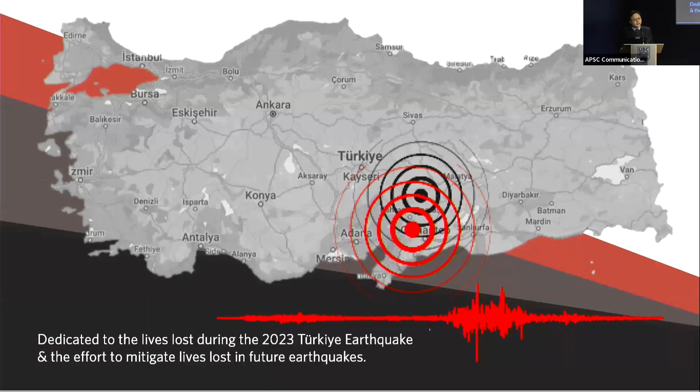Very good. All right, I've been asked to give a general introduction, so I'll jump right into it. First of all, we'd like to dedicate this seminar to the lives lost during the 2023 Turkey earthquake event, and also to the effort we are putting together for the future to mitigate any life loss in future earthquakes.

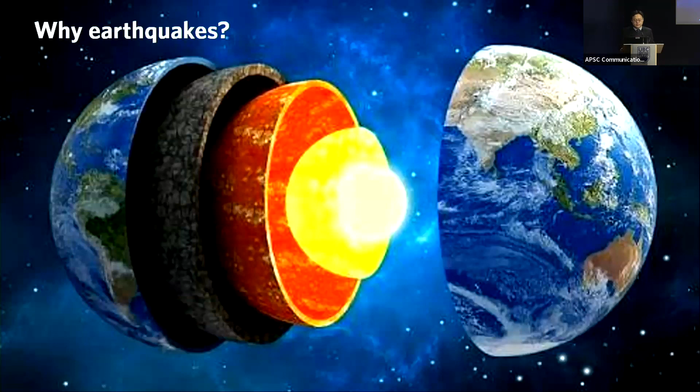Today I'm going to bring you to the event in February 2023 in Turkey. For those familiar with Turkey, it's a beautiful country with wonderful history and great food. The earthquake actually happened in the southern middle portion of Turkey, close to the city of Gaziantep. This is about 850 kilometers away from Istanbul, probably like from here to Banff, from Vancouver to Banff, so a relatively close distance that you could easily drive to if you wanted to. Right around there, close to Gaziantep.

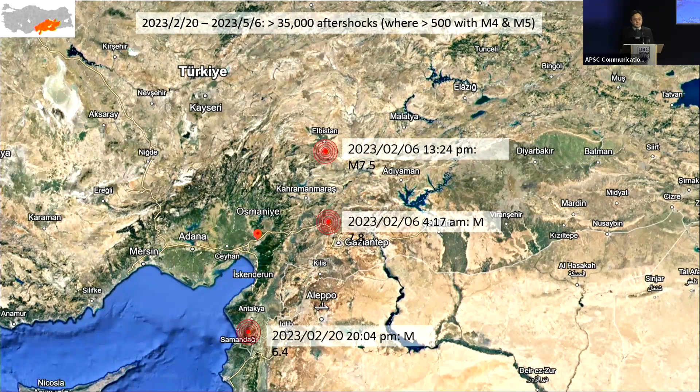And it doesn't stop. Literally two weeks later, on February 20th, another major earthquake continued to hit the region, a magnitude 6.4 earthquake that caused devastation to the entire region. And the earthquakes still didn't stop. Over the period from February 20 to May 6, there were over 35,000 earthquakes recorded in the region. Many of them, over 500, were magnitude 4 and 5 earthquakes that could be felt by us and could cause some damage.

This earthquake resulted in significant damage to structures and the environment. We can see surface ruptures all across this area. It resulted in 11 major city centers in the region being heavily affected, representing over 160 municipalities and over 1,300 villages all affected. The area affected is greater than 100,000 square kilometers, and over 14 million people are affected by this earthquake.

Half of the population of Canada would be affected by an earthquake like this. Sadly, over 50,000 people, including people in Syria, over 60,000 people have died from this earthquake. And over 2.5 million buildings were significantly affected by the earthquake. Not 25,000 - 2.5 million buildings were affected by this earthquake.

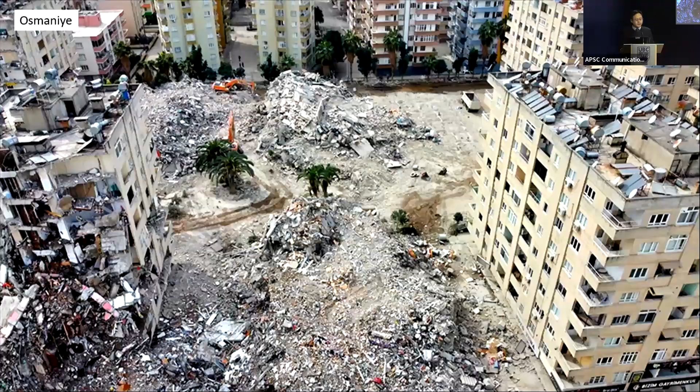Overall, based on the data we collected in the report we generated, there are over 2.5 million buildings affected by this earthquake, categorized into new and old buildings. The majority of these buildings in these 11 major city centers, more than half of them, are relatively new buildings built from 2000 onwards. Most of those buildings are reinforced concrete structures and they are residential buildings.

We looked into the damage to the buildings, and the results show over 500,000 buildings are completely damaged and need to be demolished. Close to 130,000 buildings are moderately damaged, and over 1.27 million buildings are lightly damaged and affected by the earthquake, causing a direct financial loss of $66 billion directly to the building sector alone.

In light of this, over 2.2 million people do not have a place to go home, and shelter must be provided. In addition to that, this region badly hit by the earthquake is heavily into agriculture and farming.

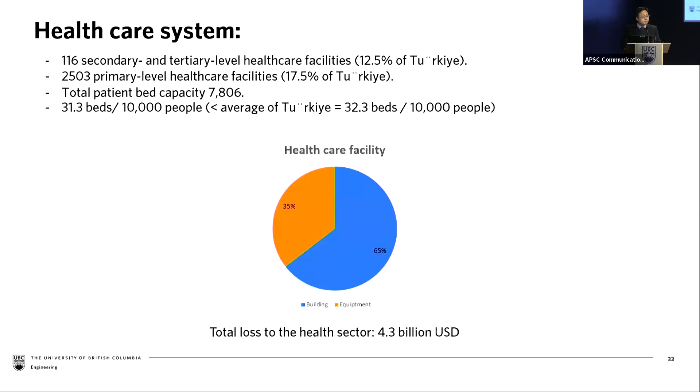In general, the social and economic impact to these 11 major city centers in Turkey affected more than 14 million people. More than 50,000 people have lost their lives, and over 115,000 are injured. More than 2 million people need a place to stay that we need to replace, causing direct financial losses to the country of 103 billion US dollars, representing around 9% of Turkey's GDP in 2023.

This afternoon we'll be going through detailed technical sections, starting with my colleague Professor Alemdar talking about the seismic effect of the region, and the geotech effect of the region, in collaboration with Dr. Keshab Sharma. Afterwards, I'll be presenting about the building code in Turkey. We wanted to know what they do differently or similarly compared to Canada and other parts of the world.

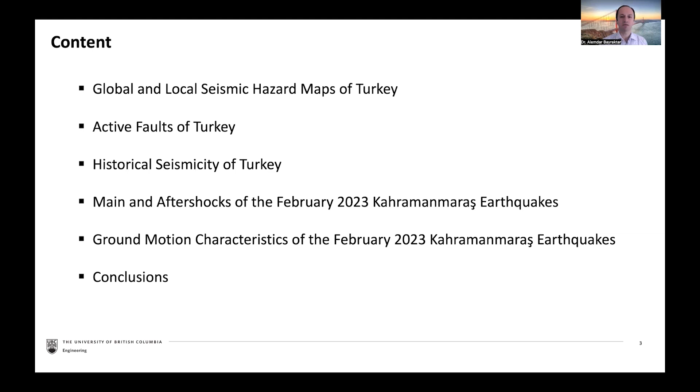This presentation was prepared by Professor Carlos Ventura, Dr. Keshab Sharma, and me. The content covers the global and local seismic hazard map of Turkey, active faults in Turkey, historical seismicity of Turkey, main and aftershocks of the February 2023 Kahramanmaraş earthquake, and ground motion characteristics of the Kahramanmaraş earthquake. Turkey is located in one of the most seismically active regions in the world.

The first earthquake hazard map of Turkey was published in 1945, then updated in 1963, 1972, and 1996, with the latest version published in 2018. The seismic parameters are defined depending on geographical location in the latest seismic hazard map for 4 seismic levels: DD1, DD2, DD3, and DD4. DD3 and DD4 earthquake levels are used for service earthquakes, while DD1 and DD2 are used for structural design.

Turkey is located between the Eurasian plate in the north and the African-Arabian plates in the south. The Arabian plate is moving towards the northeast with respect to the Anatolian plate at approximately 10 millimeters per year. The two main major faults of Turkey are the North Anatolian Fault and the East Anatolian Fault. The 2023 Kahramanmaraş earthquake occurred on the East Anatolian Fault. The North Anatolian Fault lies between Karlıova and Istanbul.

The fault mechanism of the East Anatolian Fault zone, which is about 450 kilometers long, is a northeast-trending left-lateral strike-slip fault system that lies between Karlıova and Hatay.

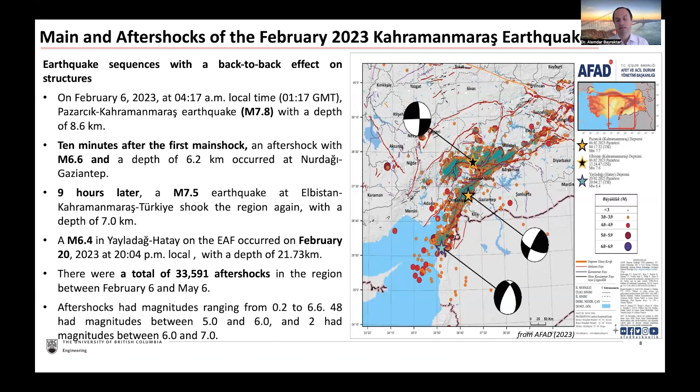These earthquakes' fault mechanisms are shown on this slide. The first main shock occurred across 3 segments: segment 1 is the Narlı fault, segment 2 is the Gölbaşı and Erkenek fault, and segment 3 is the Amanos fault.

In the 7.5 Elbistan earthquake, it has been evaluated that both the Çardak and Doğanşehir faults ruptured simultaneously. After both earthquake shocks, surface deformation ranging from centimeters to 4 meters was detected by AFAD.

The first main shock affected 11 cities, most of them large cities, as can be seen from the first image, and about 14 million people were affected during the first main shock.

The second main shock, magnitude 7.5, affected Kahramanmaraş, Malatya, and Adıyaman city, and the third one, the Yayladağ earthquake with magnitude 6.4, affected Hatay city. Due to the Kahramanmaraş earthquakes, a total of more than 50,000 people lost their lives and more than 115,000 people were injured.

According to the damage assessment dated May 2 from the ministry, the number of collapsed or urgently demolished buildings in the region was reported as more than 58,000, while the number of severely damaged buildings was more than 200,000.

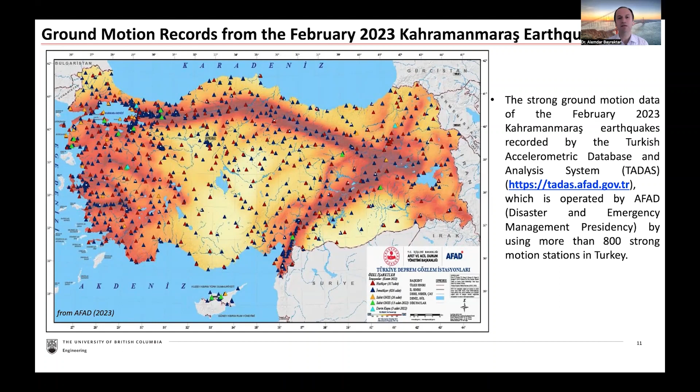The strong ground motion of the February 2023 Kahramanmaraş earthquake was recorded by the Turkish Accelerometric Database and Analysis System, operated by AFAD using more than 800 strong motion stations. All the data related to these earthquakes can be downloaded from this website.

The peak horizontal and vertical acceleration values of the Kahramanmaraş earthquake are larger than the highest horizontal and vertical ground acceleration values recorded in previous earthquakes.

Recorded maximum peak ground accelerations for the 7.8 earthquake were measured along the line from the epicenter to the Hatay station, and for the 7.5 earthquake near Elbistan and Göksun towns. During the first main shock, maximum peak ground acceleration occurred in Hatay city, 150 kilometers from the epicenter, with a measured value of about 1.4 G.

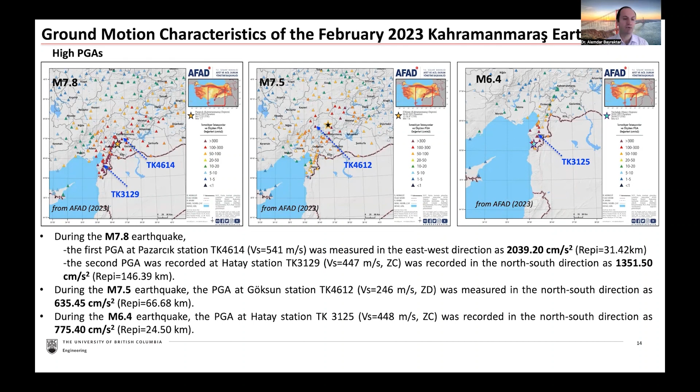During the 7.5 earthquake, the measured maximum ground acceleration was about 0.6 G. And for the last one, during the 6.4 earthquake, peak ground acceleration recorded about 0.78 G.

It can be seen from the spectra that the most affected period range for the affected area is from 0 to 2 seconds.

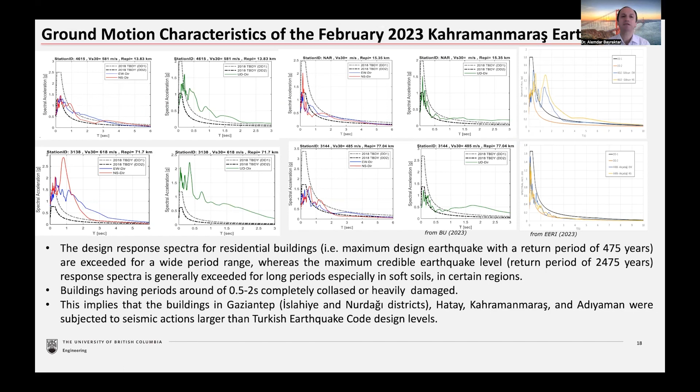When we look at the spectra from some stations during the Kahramanmaraş earthquake, it can be seen that the recorded acceleration values in horizontal and vertical directions exceed the design DD1 and DD2 design earthquake levels.

There is a video for the Kahramanmaraş earthquake; you can use the link to watch it. Now we have some conclusions.

It can be stated that, in addition to design and construction phase mistakes, there are reasons related to the seismic characteristics of the Kahramanmaraş earthquakes, including high seismicity intensity and very large peak ground acceleration, peak ground velocity, peak ground displacement, and spectral values.

Other factors include the back-to-back effect of the earthquakes, near-fault basin and soil amplification effects, shallow earthquake effects, long duration of ground shaking, epicenter proximity to many city centers, proximity of several cities to fault lines, the very long ruptured fault system, different fault segments, and underestimating seismic demands during the design process. Thank you very much for your consideration.

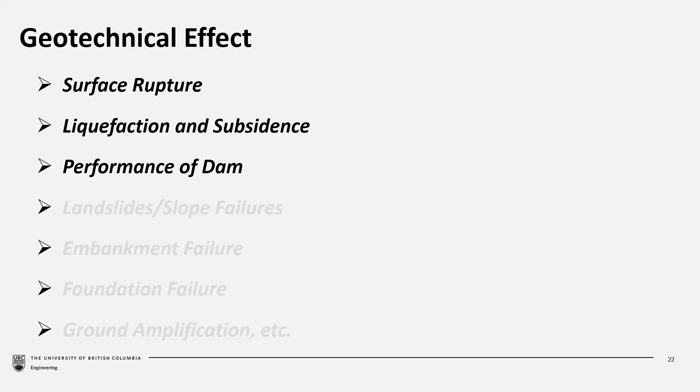So basically I'm going to talk about surface ruptures, liquefaction and subsidence, and performance of dams. Multiple surface ruptures were manifested along the fault line that crossed infrastructures and caused damage to them.

Out of many surface ruptures, I'm going to present one example. This surface rupture we visited is in Islahiye, next to the state hospital.

The longest surface rupture, produced by the first earthquake of magnitude 7.8, stretches 300 kilometers with displacement up to 7 meters, running northeast from the Mediterranean Sea.

The second surface rupture, caused by the second earthquake, is about 125 kilometers long with displacement up to 5 meters, and both cross several infrastructures like pipelines, highways, and even buildings.

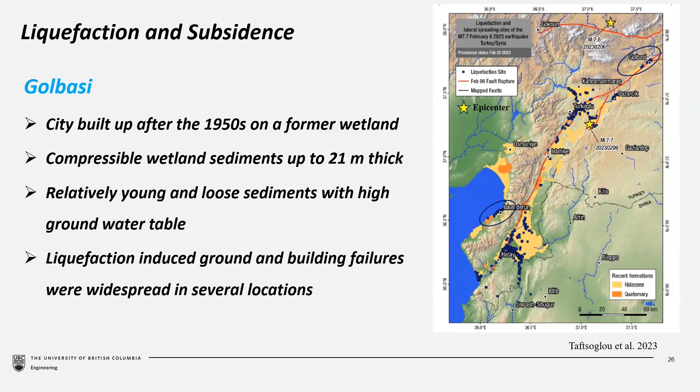You can see that the groundwater surface is almost at the surface, and the soil is relatively loose to dense. The standard penetration test number is less than 10, which is considered loose to very loose soil, very favorable for liquefaction.

These points I mark are the damaged buildings due to liquefaction. You can see that the buildings look intact, but the foundations sink into the ground by 40 centimeters in this case, while some buildings sink into the ground by more than 1 meter.

You can see several other photos from the city. The buildings look good, structural components look good, but because of liquefaction the buildings tilted, and some of them settled uniformly. Liquefaction-induced bearing capacity failure was more common in 5 to 7 story buildings compared to 1 to 3 story residential buildings. So structural designs ignoring soil conditions, unfortunately, remain vulnerable.

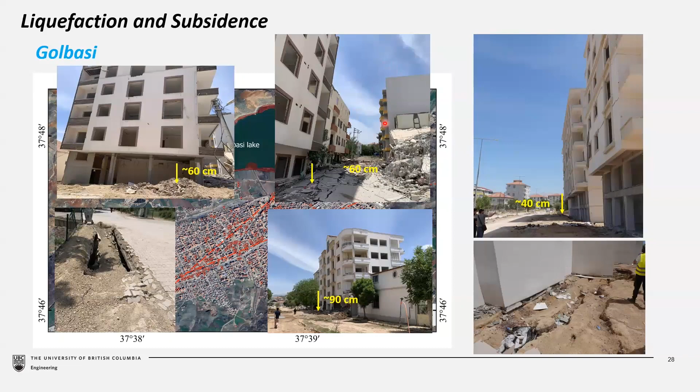These are the recreational areas just next to Golbasi Lake, and there were a significant number of extensive lateral spreading phenomena, such as multiple parallel large fractures observed along the northern, eastern, and southern lakefront. In some places, large sections of land were totally submerged into the lake.

If we look at the soil conditions, it seems the lake was filled with loose to medium dense granular materials to make the recreational area.

And similarly, we visited another city, this coastal city, Iskenderun. Iskenderun is a coastal city along the Mediterranean Sea, and here the young marine deposits and reclamation fields dominate the coastal plain. All these plains are very young, relatively young, and relatively soft.

The soil along the coastal area includes loose to medium dense sand and silty sand. Even a little away from the coastal area, the soils are loose to medium dense and severely damaged due to widespread lateral spreading and liquefaction along the coastal front, and significant ground amplification was reported.

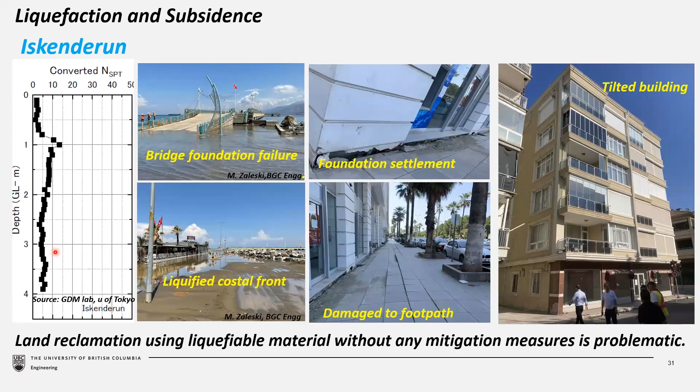So, performance of the dams. Many dams were affected by the earthquakes, due to soil liquefaction, fault rupture through the dams, seismic compression of the earth fill, crest cracking, concrete spalling, or damage to the spillways. But based on the reports available, though we didn't visit many dams, most of the dams performed relatively well, especially hydropower dams, during this earthquake.

One of the dams we visited is Kartal Kaya Dam. This is a clay core earth-filled dam constructed in 1972, with a crest height above stream level of 56 meters, and it stores 1.45 million cubic meters of water. The purpose of this dam is irrigation, fishing, and recreational activities.

This dam is very close to the epicenter of the first event, magnitude 7.8, and moderate damage was observed with crack widths varying between 15 to 35 centimeters. But when we were there, the dam was already repaired.

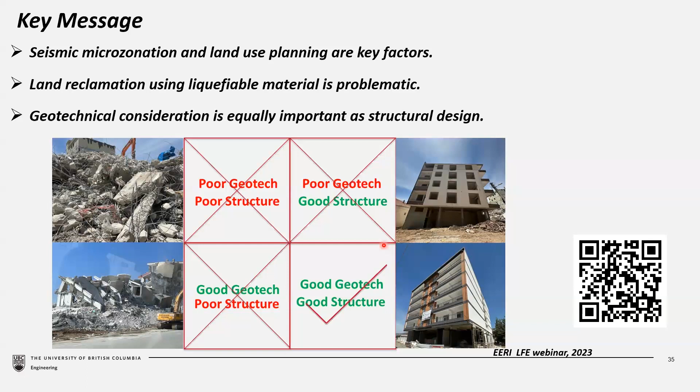Thank you, that's all. In the next 20 minutes I'm going to present what we have learned from the Turkish code. I really have to give credit to my colleagues, Professor Alemdar and Svetlana Brzev, who have worked closely with me to really understand how the Turkish building code works. It's really exciting, actually - now I can give a lecture about the Turkish building code.

Turkey is one of those countries well experienced with earthquakes. Every 15 to 20 years we see one major earthquake. So if you want to bet your research on earthquake engineering, Turkey is a good place to go.

From the early 1940s to early 2000s, there are so many big earthquakes - over 100,000 deaths, over 200,000 injuries, and over 750,000 buildings destroyed before the February 2023 earthquake we're talking about today. These earthquakes have shaped the way the building code works in Turkey.

To give you some high-level history: the Republic of Turkey was established in the early 1920s. For the first 20-plus years there was really no formal building code prepared to guide construction. In the 1940s the Turkish government started adopting the Italian building code and using it for design. Shortly after that, two major earthquakes happened after the building code was formally adopted.

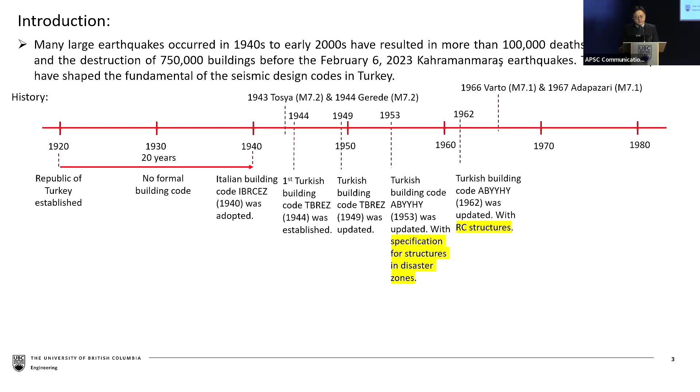In 1966 the Varto earthquake, and in 1967 the Adapazari earthquake, both magnitude 7.1, occurred. The code was once again updated in 1968, where the building code started with strong emphasis on different dynamic effects related to earthquakes.

And you can bet, rest assured, shortly after that another major earthquake hit Turkey: the 1971 Bingol earthquake, magnitude 6.8, and the 1975 Lice-Diyarbakir earthquake. This is also the same year Turkey decided to update their building code, 1975.

Including dynamic analysis and modal superposition procedures. In 1999, the Kocaeli earthquake and Duzce earthquake, both magnitude 7 and above, caused a lot of casualties and losses. Turkey started updating the building code again in 2007. Then in 2011, the Van earthquake, magnitude 7, hit. Very recently, the latest code in Turkey was updated in 2018, which in my personal opinion is really robust.

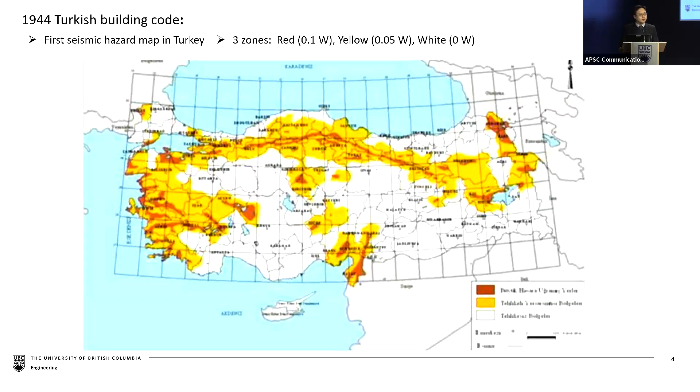So if you're in the red zone, you need to design for an additional 10% of your structure's weight as earthquake load. If you're in a yellow zone, you design for 5% of the building weight as earthquake load. If you're in a white zone, congratulations—you don't have to worry about earthquake. This is simple and easy; life moves on without consideration of earthquake.

They distributed the earthquake forces, once calculated, uniformly over the height of the building. They also clearly indicated where you can or cannot build. Some of these rules are common sense, some are not. For example, you should not build in a swamp, you should not build on soft soil, and you should not build on a very steep slope. They wrote down those locations where you should not build your building.

In 1949, the second version of the building code cleaned things up, building on a good backbone. One thing they addressed: maybe we need to seriously consider how we account for the weight of the building. The weight isn't just the dead load we see in the structure—there's also live load, furniture, and people, which contribute to the shaking and created load. So the Turkish building code started including that. How much of the live load, the chairs and tables, should we account for?

The decision depends on the functionality of your building. If it's residential housing, with not a lot of people using it, we count all the live load but take only 33%, one-third of it, and add it to what we consider the earthquake forces. If you have bigger houses or high-occupancy buildings—they may not have had high-rise buildings in 1949, but high occupancy buildings—then all the live load plus the dead load need to be accounted for when studying earthquake effects. They once again cleaned up the 3 zones.

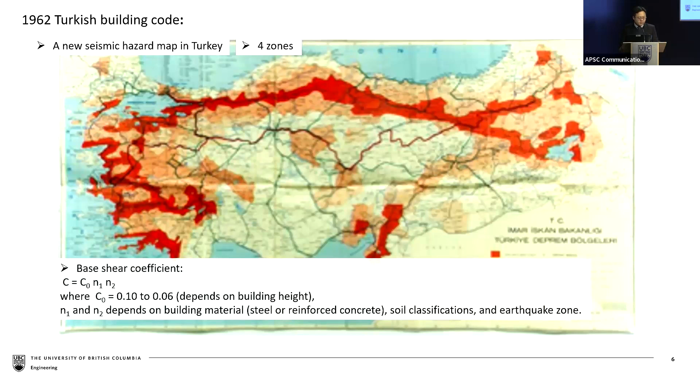In 1962, Turkish colleagues made a major revision to their building code. First, they remapped and presented a new seismic hazard map, this time going from 3 zones to 4 zones. So some regions which were gray or yellow before may not be the same zone anymore. The calculation of earthquake forces you need to account for now depends on a few factors.

One factor: it's either 10% or 6% of the weight calculated, depending on the height of the building you're dealing with, and they understood that this changes. Another factor affecting how much earthquake force you should account for depends on whether you're designing the building with a concrete structure or a steel structure. It will also be affected, as my colleague showed, depending on the ground condition.

In 1968, our colleague in Turkey made a major revision to that building code, with many significant changes. First, they started looking into reinforced concrete and putting requirements on how to build those concrete buildings. They started using spectral shapes, beginning to resemble what we're doing today.

They also introduced an importance factor, same thing we're doing today. In a regular building, the importance factor is 1, but for very important buildings like hospitals or fire stations, we need to make sure they remain functional. So they increased the level of importance and designed with 50% more earthquake load to ensure they stay functional after the earthquake.

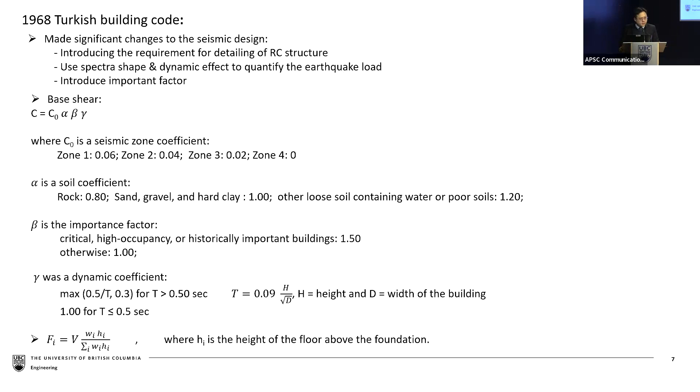In 1975, our Turkish colleagues once again ramped up the earthquake code because they were seeing earthquakes every 10 to 15 years. Crazy, yeah? They realized the code needed further improvement. This time they reshaped the seismic hazard map for the country into 5 zones, zone 1 all the way to zone 5. The amount of earthquake forces designed for once again depends on where you are.

Still, in certain parts of the country marked white, zone 5, that means there's no earthquake. Most of the time when I've visited places, they're always in high seismic zones. So maybe next time you want to go somewhere for fun, the white zone may be a place to check out. Yeah.

Very good. It also depends on ductility factors. Back in 1975, we understood designing the structure elastically wasn't economical. We had to ensure concrete and steel could absorb earthquake energy so we could design more efficiently. So they provided a ductility coefficient factor depending on the structural material used. They also used the importance factor again, keeping it the same—either 1 or 1.5 for building usage.

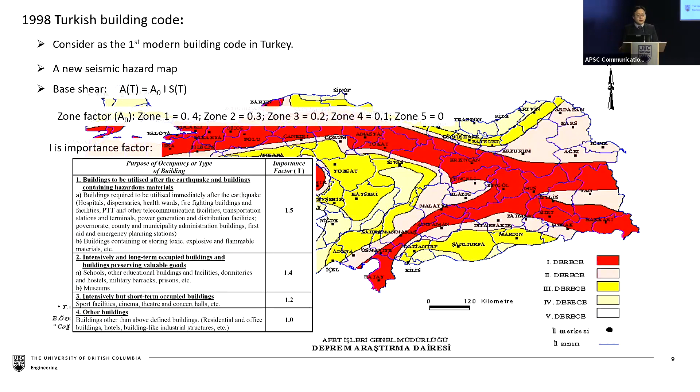Very similar to the 2005 National Building Code in Canada, where we have been using it for the last 20 years. In terms of the intensity of earthquake shaking, they provide a design spectrum, which is soil dependent. If you're sitting in hard soil or soft soil, that will affect how much force you design for your building. In this building code, it also shows you different things you must consider.

You need to start looking into irregularity, torsions, stiffness irregularity, strength irregularity, no different than what we're doing here today in Canada, where we have a whole series of irregularities that we try to tell engineers not to do. Also in that building code, it started using, very close to what we do, a reduction factor depending on the type of structural system. These are the reduction factors you can use.

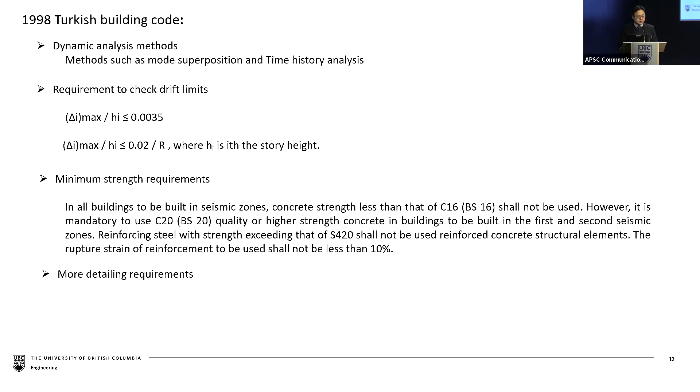And now you can start seeing that the codes are getting very, very similar to our Canadian code. They started allowing use of modal superposition, time history analysis, no different than what Canadians are doing here today. They're checking about the structural drift, same thing as what we're doing today. They can drift up to 0.3% under certain conditions, 2% under different conditions. They also have minimum strength requirements for material strength and also design shear. And there are many more detailing requirements which I'm going to push to the end.

Afterwards, an earthquake happened and they refined the code one more time. In 2007, our Turkish colleagues made some minor changes to the 1998 building code, because they did a significant change to that one. But there are still some new changes in the 2007 code. I listed down what's important.

They added a chapter. The chapter is dedicated to assessing and strengthening existing buildings. Canadians don't have such a code. We only have building code for new buildings. We don't have procedures for you to assess and strengthen existing buildings.

Second, they started providing different level earthquake shaking, just like what we do in Canada, where they have small earthquake, medium earthquake, and high level shaking earthquake. They also have performance objectives, what we're doing here in Canada. We want to make sure the building does not collapse — collapse prevention, immediate occupancy, and life safety performance objectives.

And they started allowing engineers and researchers like yourselves to assess the condition of buildings using pushover analysis. I can see many students sitting here in the room today. So the pushover analysis I teach you, you can use it. It's not fake, okay?

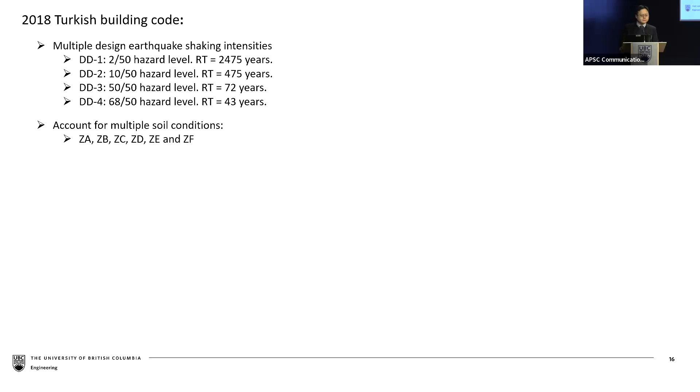They started to provide very clear classification about how you classify the ground, and then they started providing tables for different soil conditions we can use. Let me show you. And they introduced something fairly interesting — they started introducing something called building usage class, whether you're a hospital, you're a school, what's the number, 0 or 1 or 5?

I already passed the time. Very good, the class will be ending soon.

So buildings have a usage number. If you're designing a hospital, with the intensity and building type, you'll know what seismic design category applies, and the higher the category, the higher the performance requirement. The building code tells you which level of performance you must achieve.

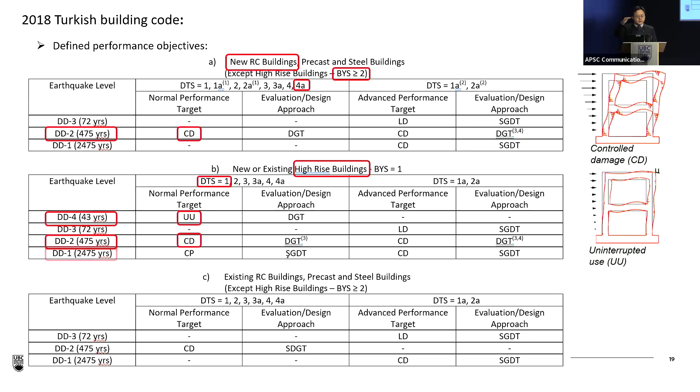I'll show you one last example since I don't have time. For example, if you have a new RC low-rise building and you're in design category 4, the building code says you need to design for an earthquake with a 475-year return period, and the performance objective is to control the damage. Similarly, for high-rise buildings at different categories, they specify the performance you need to achieve.

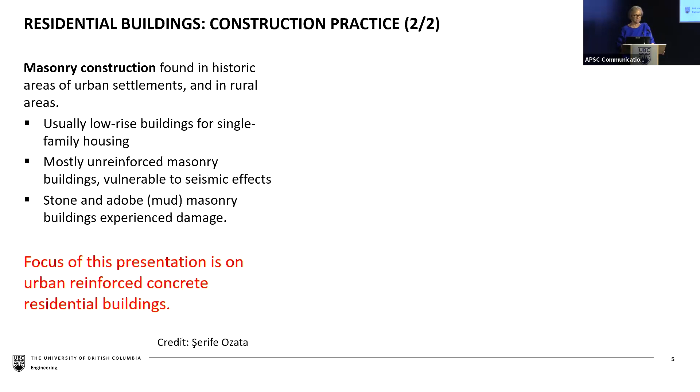So the focus of my presentation is on modern urban buildings, which were most affected. Regarding seismic design codes and implications for design practice, I'll skip most of it since Professor Yang has already discussed various codes in detail.

Out of the three codes I would single out on this slide—1998, 2007, which is more or less similar in terms of implication on reinforced concrete practice, and 2018, the latest one—I would say the most important are 1998 and 2007, because I believe most buildings were designed and constructed according to those codes.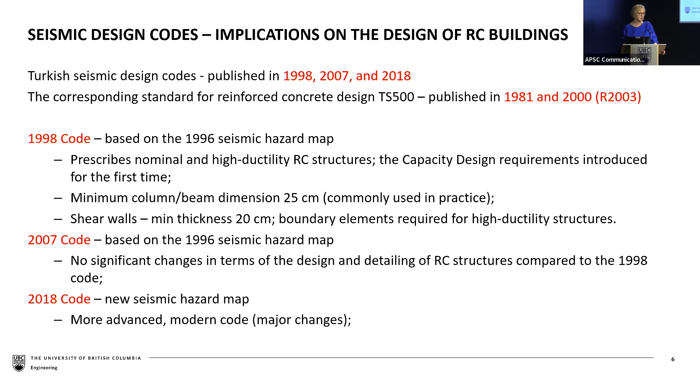So I would like to show some details of the construction detailing practice, which are important for this. As Professor Young mentioned, the 2018 code is modern and more advanced, both in terms of analysis and design and detailing, but the 1998 and 2007 codes are also very good.

It's required to provide cross ties, and the columns have to be properly confined, which is critical for integrity and safety in earthquakes. There are also closer tie spacings in the columns at the bottom and top, which is normal practice, with very similar rules to the spacing used in Canada.

For beams, similar practices are there, with closer spacing following capacity design principles. I'm showing only the high ductility category, which is expected to be used in these high seismic zones such as the ones we visited, so I'm not discussing lower ductility or more relaxed provisions.

For walls, again, good practice was there. These are some detailing requirements for the walls. They had the requirement of boundary elements with a certain reinforcement ratio, similar to what we have in our concrete code.

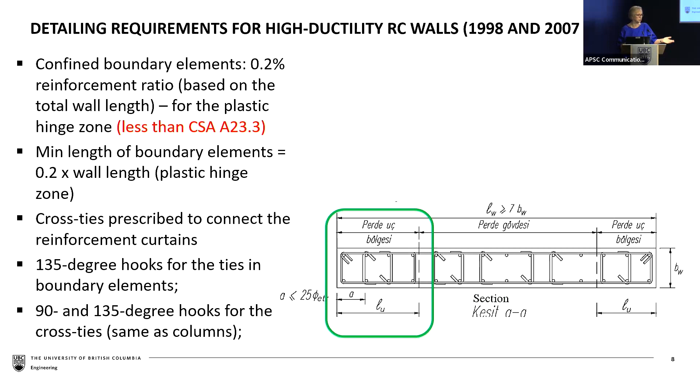I would say that in Canada you would find, at least based on what we saw in Turkey, more heavily reinforced boundary elements than what we could see in Turkey, but it's not a big difference. Here is a detail of the cross section of the reinforced concrete shear wall with this boundary element, and again there is a requirement for confinement and cross ties connecting the two curtains of reinforcement, important for preserving integrity. Anchorage requirements are similar to Canadian 135-degree hooks, which we know are required for good earthquake performance.

And causes of damage—these are five causes that I personally would emphasize. One is certainly that there was extremely high intensity of shaking at many locations, which unfortunately we have evidence for and it's been well documented, though we don't have the spectra to show now. For example, Antakya, the city, experienced really significant shaking and was devastated. As a reference, one station, and it was a very well-instrumented earthquake with many stations working during the event.

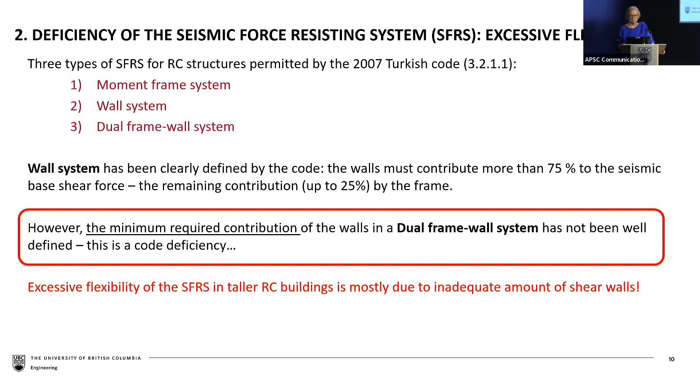And that left lots of space, I would say, for interpretation by engineers. I checked that with colleagues from Turkey, and that is true - it's an omission in the code. As a result, there is excessive flexibility of the system in reinforced concrete buildings, mostly due to inadequate amount of shear walls. I will show you an example, just one of many, because of limited time.

It is in the city of Kahramanmaraş, a big city, as Professor Young showed it, a vibrant city in the center of the province, Kahramanmaraş as well. In that city we visited a complex of 4 buildings. That was our very last visit on the 5th day of our trip, and on the outside they looked very nice - not very damaged - but still offered lots of opportunity for observation. So this is a typical building.

It had 11 floor levels, 4 of them like a podium type level, and 2 underground. So you can see the upper 2 levels of the podium plus the above portion is just a tower, let's call it. The buildings were designed in 2016 and constructed in 2019.

What's also interesting is that in Turkey, in the buildings we visited, most of the columns are really oblong, and there is a very gray area between columns and walls. According to Turkish code, again 2007, it is sufficient for a wall to have a length to thickness ratio of 7 to be called a wall.

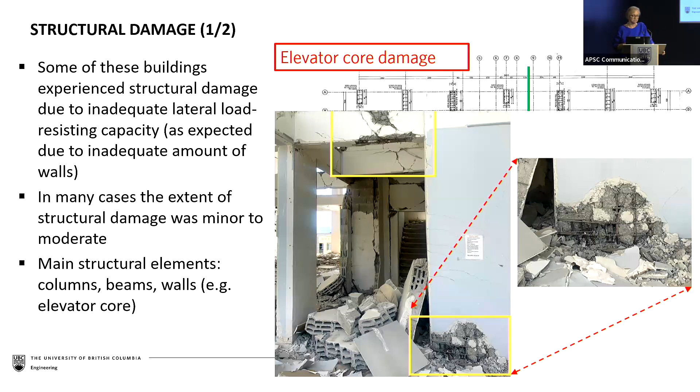Another very important aspect, which I would like to say is the highlight, is that there was extensive non-structural damage. Even in buildings that, by careful inspection, had very little structural damage, they had extensive non-structural damage and had to be vacated, and as we understand, they will be rebuilt.

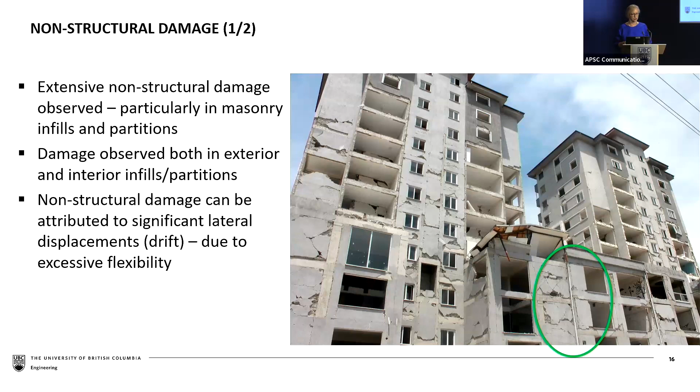So non-structural damage was extensive. This was observed both in exterior and interior walls. These were masonry infills in these frame structures, and it can obviously be attributed to significant lateral displacements, drift, which caused this damage, and also to poor quality of these non-structural elements. This is an interior view of some of these infills - they're completely crushed or fallen out, and at the upper floors you can see interior partition walls or infills also completely collapsed.

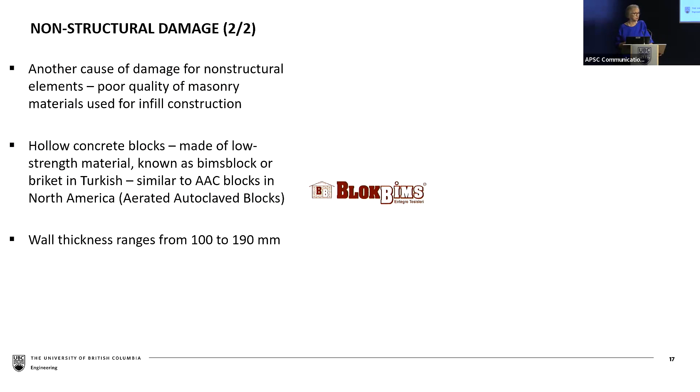According to manufacturer's information, it's 1.7 megapascal strength. So this shows how strong Professor Young is, or how bad the masonry is.

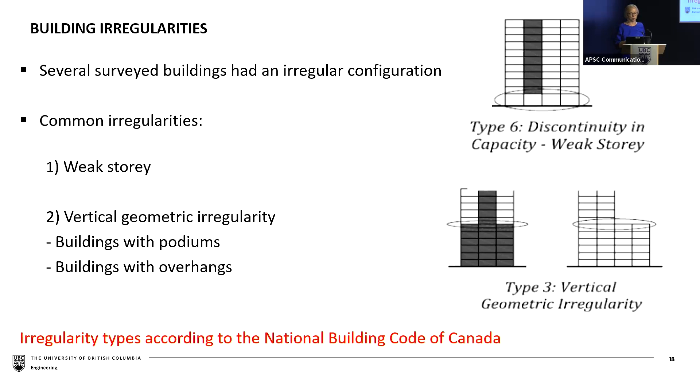Few more things, just a little bit more to say. Many buildings had irregularities - whether these irregularities contributed, certainly yes, but whether they were taken into account in design, we don't know. Common irregularities are weak story, and vertical geometric irregularity, both of which are in the Canadian code, the National Building Code of Canada.

Weak story is well known in every earthquake - there are so many weak story or soft story collapses, and this earthquake is no exception. That is the case where buildings have an open ground floor, or even the floor above, without infill walls, while the upper floors are much stiffer because they are frames with infill walls. Therefore, during an earthquake, these bottom floors are very flexible and have a high demand, there is a P-delta effect, and they simply collapse at that level.

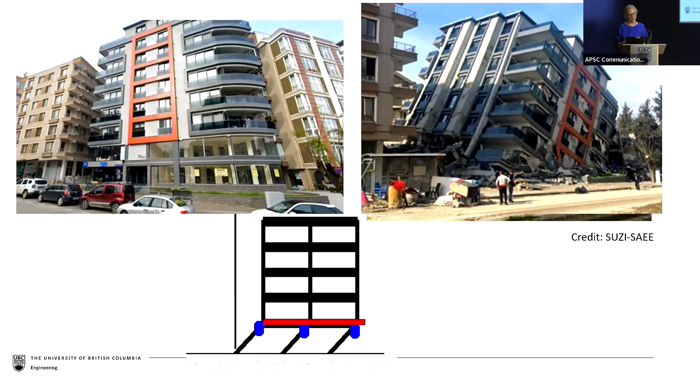We have seen some collapses - this is a photograph of a building in Antakya before, and this is after. I really like this building because we haven't seen it demolished; it was already demolished by a Serbian association, but we have seen other cases, not so good, and we have seen this type of collapse.

In any case, that is what I wanted to say. The major takeaways Professor Young will show at the end. I would say the key message: many buildings did perform well.

Many reinforced concrete buildings had minor structural damage, but severe non-structural damage across the board, mostly due to high flexibility of the system. These are buildings where people have ended up in containers and tents.

We wish them all the best and a fast recovery, and hope they can move into their new homes if they cannot return. So thank you, I guess questions will come at the end.

Good afternoon, my name is Bishnu Pandey. I am faculty at British Columbia Institute of Technology, BCIT. I'm talking about school buildings. They are a subset of buildings, but they are special because they are meant to keep our children safe. So that's why there's special treatment for schools.

I am going to present what we saw in Turkey, and later Allison will tie that back with parallels in Turkey's system of school safety, or what we observed, back to BC school safety. Okay, to start with...

We saw good things about Turkey overall, but when it comes to the education sector, like other major earthquakes where schools are mostly vulnerable, there's a huge impact on the education sector, and the Turkey earthquake is not an exception. We saw major destruction: almost 10% out of 20,000 school buildings in the affected area. Almost 2,000 buildings were damaged beyond repair and had to be demolished, and the rest were either minor or partially damaged.

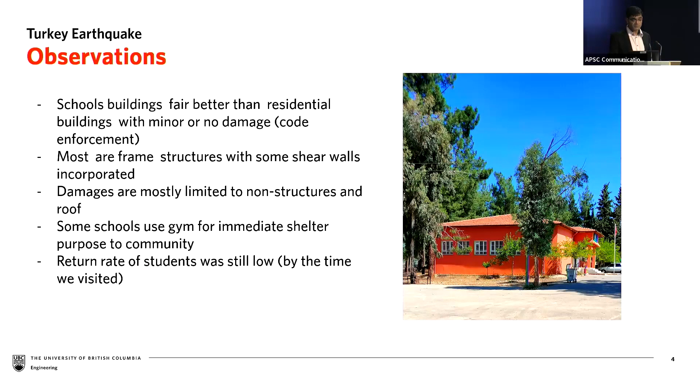But I want to go over quickly a few different case studies. I'm presenting three or four here, but there are many school buildings we saw. This is in one of the cities hit very hard by the earthquake, with a population of 40,000 people, where 2,500 people died, and almost 90% of buildings were damaged. In that city, out of 25 schools, 10 school buildings were completely damaged and beyond repair. That's a very hard hit city. We saw two school buildings there.

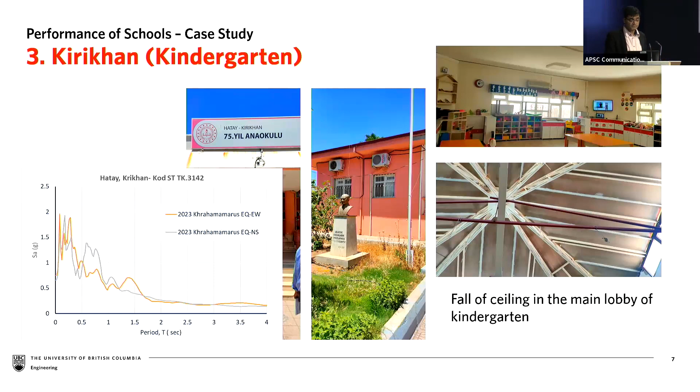I don't want to go into more detail, but this technical institute has so many labs, laboratories, and workshops, and that's where most of the damage is. It's all non-structural damage, but it makes the whole building unusable, so they're putting everything away. Even government buildings with labs and laboratories are all gone like this. That's another instance we see.

This is the last one I'm showing because it has a characteristic - it did not have damage. It's in Osmaniye, where the ground motion is a little bit lower compared to the DD-1, the 2475-year earthquake motion at the top. It's low, but we don't see major damage there, just very minor damage. That's a good thing, but the story is this school was assigned additional students registered from other schools and provinces to come after the earthquake.

At that point, the government assigned 400 students, but how many actually came? 280. By the time we went there, it was only 80 students. Even with minor damage, students are afraid to go - they say they don't want to go there. So it gives us a sense that in school buildings, it's not only the structural damage, but even small psychological impacts that affect students and parents, making them not want to send their kids there. That is what is happening.

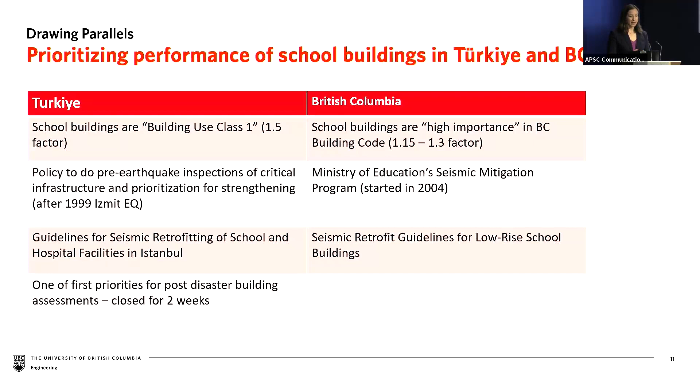Thank you very much, Bishnu. I am Allison Chen, I'm a practice advisor at Engineers and Geoscientists BC, and I will be tying our lessons back from Turkey to BC, because we have a lot of school buildings, a lot of vulnerable buildings. This table shows that in BC we care equally, or very similarly to Turkey, about the performance of school buildings, both new and existing. So for new buildings we have higher performance levels in the code, and Tony talked about that a little bit. And for existing buildings, both countries have programs for the assessment and seismic retrofit of existing buildings.

Here we have the school seismic retrofit program. The Ministry of Education, back in 2004, realized that the inventory of existing school building stock was concerning. So they created funding and engaged Engineers and Geoscientists BC and UBC to create the first seismic retrofit guidelines, fundamentally for the assessment and retrofit of existing school buildings in BC. They include text-based guidelines and a web-based analyzer to assess the performance of existing systems and various retrofit strategies to increase the life safety of these buildings.

Over the last 20 years, these guidelines have grown to 14 manuals and over 2,000 pages of information. This is all to incorporate new research and state-of-the-art practice, and really lessons learned from different earthquakes around the world. So we're going to take the lessons learned from Turkey and update these guidelines.

Ultimately, the goal of the seismic retrofit guidelines is to mitigate the risk of seismically deficient buildings in the Ministry of Education's inventory, as I said. So the goal is to achieve a common life safety objective with a consistent approach to the assessment of resilience. These guidelines enable us to consider different levels of seismic hazard, kind of like the Turkish building code—so it's not just the maximum credible earthquake, there's a lower earthquake as well—construction type, and materials. This is all done using a performance-based methodology, setting drift limits, and it's done in a cost-effective manner, because following the building code is much more stringent than looking at existing buildings with a performance-based methodology.

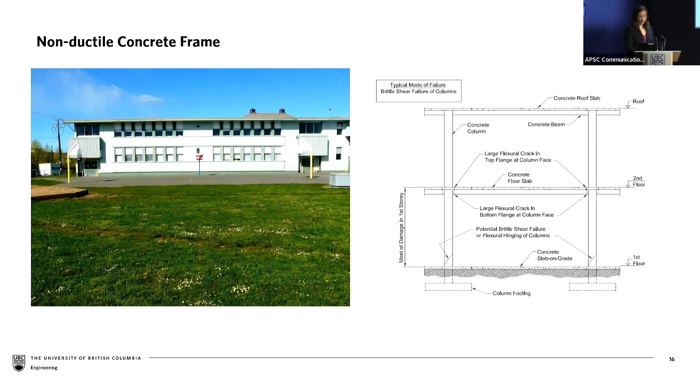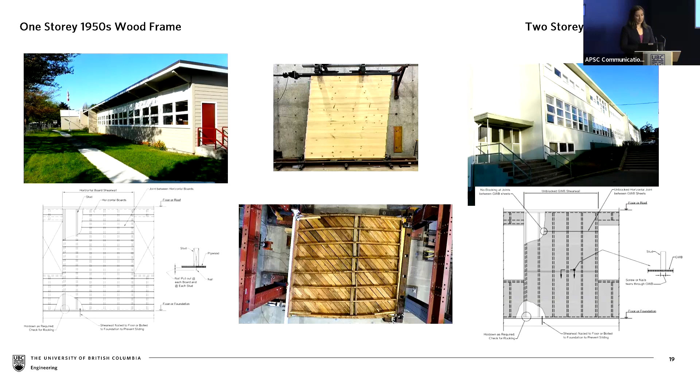Yeah, so just wrapping it up here, another couple examples. We did a lot of testing over the last 20 years for various types of retrofit upgrade strategies. Really overall, like Svetlana was talking about, and this is not just for school buildings, but lessons from Turkey to here are that the details really matter. They matter in existing buildings, they matter in new buildings. So making sure that they have positive connections and adequate connections from horizontal to vertical lateral load resisting elements, a clear load path, and all the hardware and overturning resistance are in good shape.

Thank you. My name is Jeffrey Salmon. I'm a structural EIT with Ausenco Engineering. And for the last session before the break, I'm going to be discussing the performance of the healthcare system, or the healthcare facilities.

So this is a bit of a reiteration from what Tony had mentioned earlier, but it has a significant impact on the performance of the healthcare facilities. In 2013, the Turkish Ministry of Health issued a regulation that required base isolation for large hospitals in high seismic zones. In 2017, the seismic design for base isolation was included within the Turkish codes. And so as of 2017, a total of 72 base isolated structures were located within Turkey. So these structures would have been hospitals, schools, or portions of the airport.

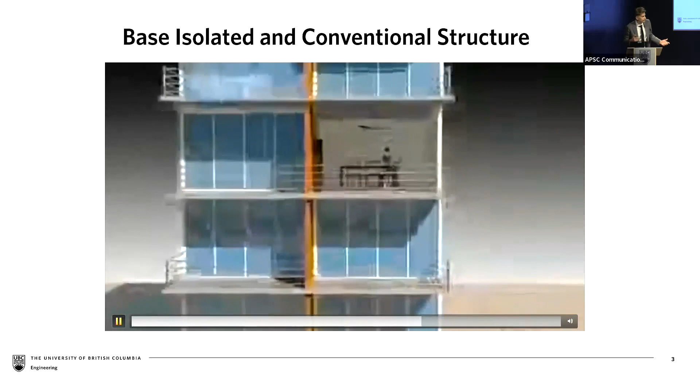Okay, so just to make sure we're all on the same page with what base isolation is, just a quick illustration. So the structure on the left is your conventional fixed base structure. The structure on the right is base isolated. So when this video focuses on the fixed base structure, what we'll see is that maybe the structure is okay, but the components within the building are moving around and falling over. This is one component of non-structural damage. With the base isolated structure, however, all of the deformation occurs at the isolation layer, and then the structure essentially remains intact, preventing damage to both structural and non-structural components.

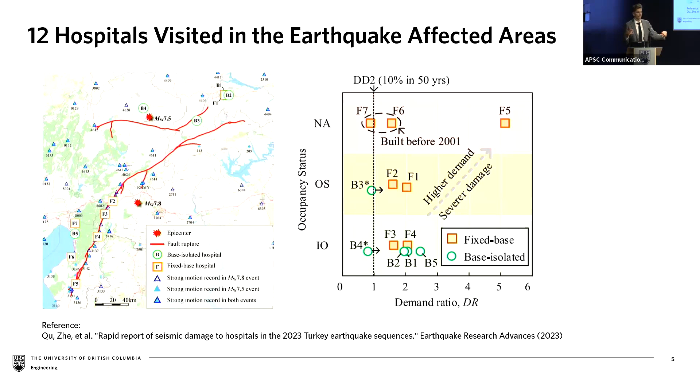This figure might take a little explaining, but it summarizes how base isolated structures compared with fixed base structures. What we have are the demand ratios, the earthquake demand ratios the hospitals would have felt. A demand ratio of 1 corresponds to an earthquake with a return period of about 500 years. A demand ratio of 2 corresponds to what we use in Canada for seismic design, an earthquake with a return period of about 2,500 years. Right away we can see that a lot of the hospitals experienced significant shaking.

Along the y-axis, what we see is the occupancy status of the hospital. IO is immediate occupancy. OS is occupancy suspended, meaning they were not occupied. And NA means no access.

The second thing I want to highlight is that 4 of the 5 base isolated hospitals visited were immediately occupied after the earthquake. The reason one of them, B3, had its occupancy suspended is because it was reported that the moat around the base isolated hospital had been filled with material, which effectively renders the isolation system ineffective.

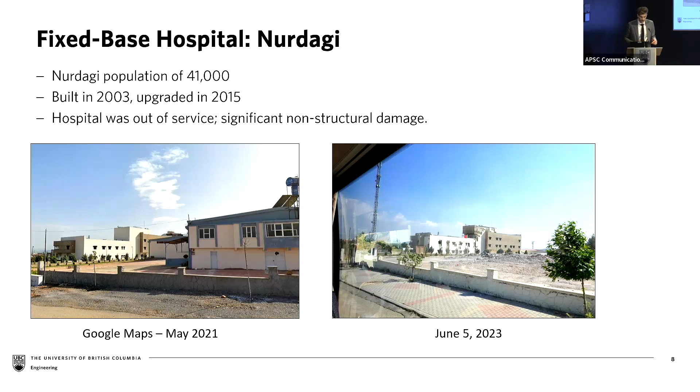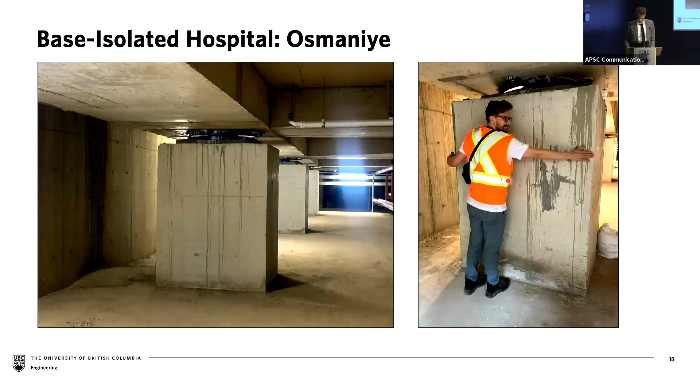Okay, so just some general observations. The hospitals were subjected to a significant earthquake, as my colleagues have already mentioned. Second, the base isolated hospitals performed well, where they were operational during and after the earthquake, except for the one that I had mentioned where it was reported that the moat had been filled, which effectively just removes the isolation system from doing its job.

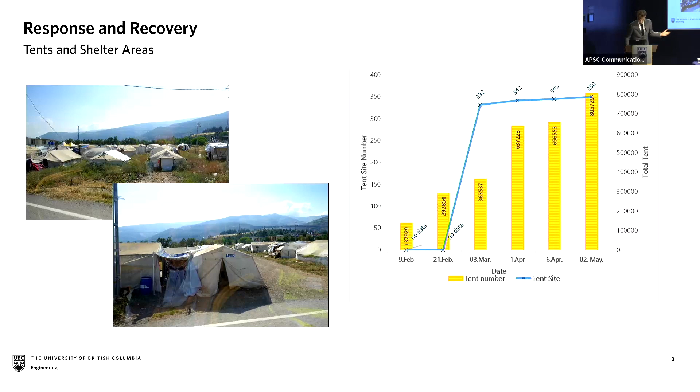Okay, so we talked a little bit about some of the debris that would have been in the roadways. What we had noticed while we were there was the debris collected from the damaged buildings. That debris was shipped to sites where it was separated so that the material could be recycled.

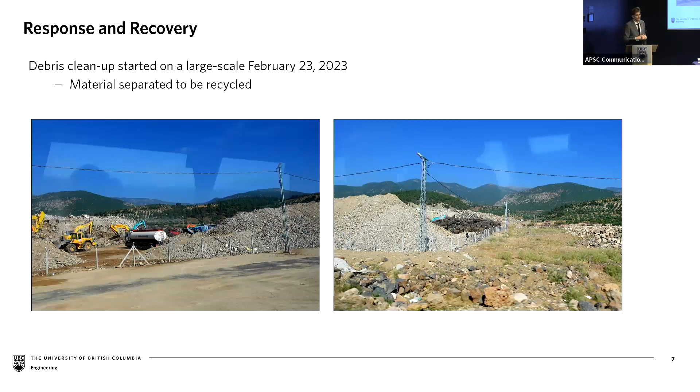Okay, so some of the reported issues, based on the reading and while we were there, is that Turkey did have a really strong response to the earthquake, but of course there's always room for improvement. One issue was a damaged airport runway, which hindered some of the response and aid in the region of Hatay. It took 6 days until that airport was operational again.

Rescue and aid was delayed in some regions due to debris, as I mentioned, and there were also reports of some mismanaged distribution of goods. I think you can understand that after an event like this, communication would be tough. So there were some regions that reported an excess of blankets, and others that were in need of blankets. With that, I'm going to turn the slide over to my colleague Şerife.

To discuss a little bit more about the damage assessments performed on the structures after the earthquake. Thank you. So I'm Şerife Özata from Turkey. I work at Ahi Evran University, and I was a volunteer during the damage assessment process of this earthquake. Now I will mention a little bit about damage categories of buildings and elements of reinforced concrete structures. Then I will define the damage assessment algorithm and give details about exterior and interior assessment.

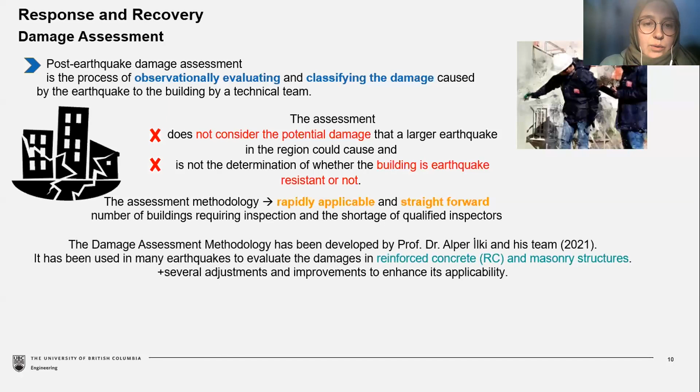When we consider the number of buildings that require inspection and the shortage of qualified inspectors, the assessment methodology must be rapidly applicable and straightforward. Especially after the 1999 earthquake in Turkey, Professor Dr. Alper İlki and his team developed a methodology, making several adjustments and improvements to enhance its applicability. This methodology can be used in RC and masonry structures, and it is accepted by the ministry as a general damage assessment method in crisis situations. You can find details in this reference.

So I will start with the building damage categories. There are 6 different categories. The first one is undamaged building - you will not observe any earthquake-induced damage in this kind of building. For the slightly damaged building, structural or vertical elements may have some minor damages. And for moderate damaged building, you will see certain decrease in the capacity and performance of the building.

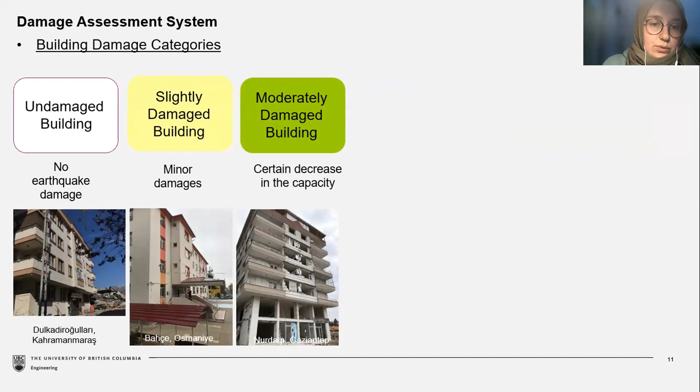This is an example from the field. And for the heavily damaged building category, the buildings in this category have significant loss of their pre-earthquake performance and capacity. You see that one floor completely collapsed.

And for buildings to be urgently demolished, you will see partial collapse of one or more floors, or noticeable residual displacement in the building. So we give them priority to be demolished since they may possess safety risk to life and properties. And you will see that the building's structural integrity is compromised in this collapsed building.

And for the members, we have 5 different damage categories. First one is type 0 - you will not observe any crack or compression damage on the structural elements. For type A, you need a crack measure, and you will observe residual crack smaller or equal to 0.5 millimeters. For type B, you may observe a crack with width between 0.5 and 3 millimeters, or you may observe cover crushing of a column generally, or shear walls.

And for type C damage on the members, you will definitely observe a crack bigger than 3 millimeters, and you will see cover spalling. And for type D, you may observe buckling of the reinforcement, core crushing, or noticeable residual displacement of the reinforcement.

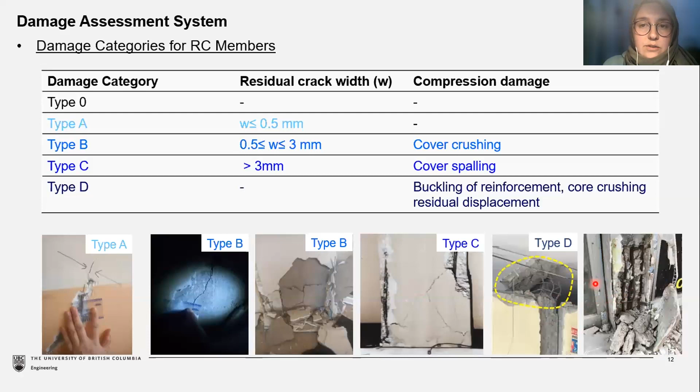So this algorithm consists of a 2-stage procedure. We start with exterior assessment. Firstly, you have to check all the facades - we control all the facades. This is a school, and we have to be sure that these cracks or damages are non-structural.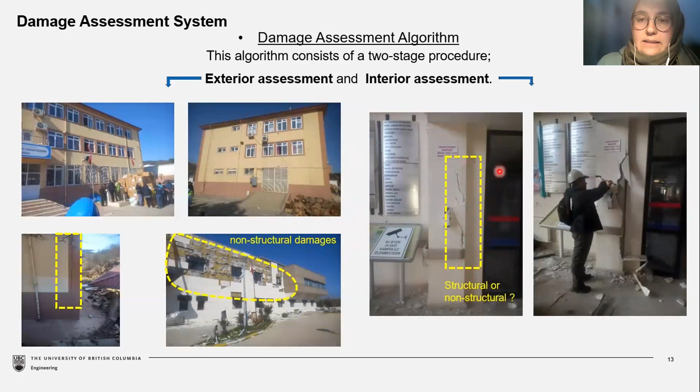If these buildings may cause any problem or damage to you when you enter the building, then you will not enter and you will not start the interior assessment. But if you are sure that these are non-structural damages, then you can continue to interior assessment. When you go through the building, you will see some cracks or damages, and again you have to be sure whether they are structural or non-structural damages. So you have to use a hammer or some equipment, some small tests, to check if this crack belongs to plaster or belongs to a column or shear wall. When we checked this part, for example, this was not a structural one.

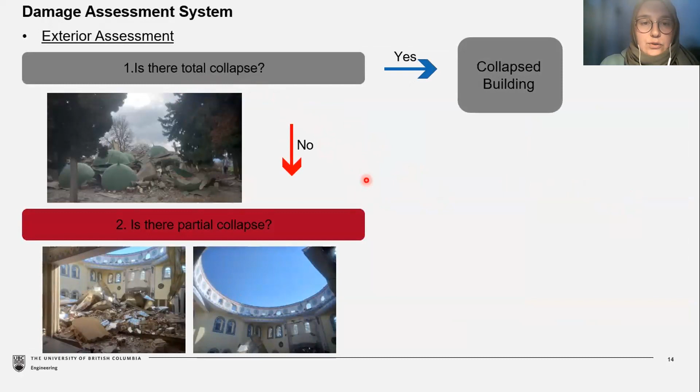So for the exterior assessment, we have 4 different questions. First one: is there a total collapse? If your answer is no to this question, then you will understand that there may be a partial collapse or more, so we continue to ask: is there a partial collapse? If your answer is yes, then the building must be urgently demolished. But if your answer is no, then continue to the third one.

Is there any permanent horizontal residual displacement measured at any story in the building that is greater than 1% of the corresponding story height? If your answer is yes, then this is a heavily damaged building, but if the displacement is bigger than 3%, the building must be urgently demolished. And if your answer is no to that question...

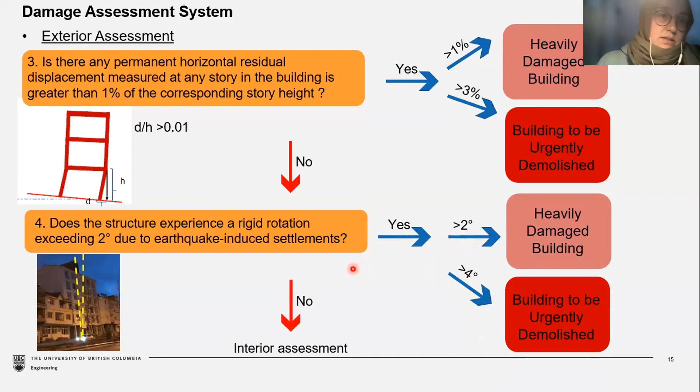...we ask the fourth one: does the structure experience a rigid rotation exceeding 2 degrees? If your answer is yes, then this is again a heavily damaged building, but if the rigid rotation exceeds 4 degrees, then the building must be urgently demolished. And if your answer to these 4 questions is no, then you can continue to interior assessment.

There are different types of interior inspections depending on the urgency of the inspection, the size of the building, and the extent of the damage.

These are detailed, rapid assessments used in crisis situations, when you need to understand the extent of the damage during the earthquake. But you must be sure this method is applicable only for low and mid-rise buildings with 10 stories or fewer, and the building must have a plan area equal to or less than 800 square meters.

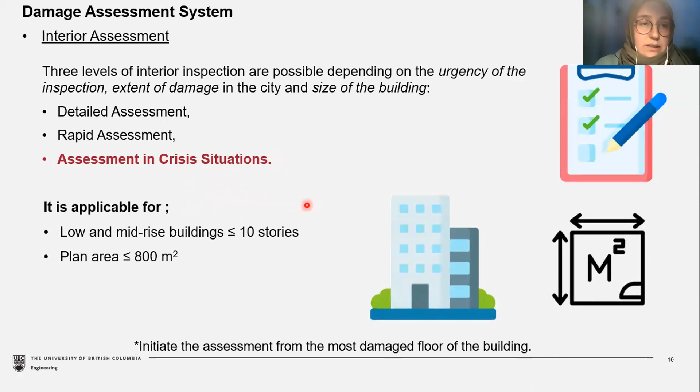Another important thing is we start from the most damaged floor for interior inspection. Again, we ask questions using damage categories to check which one applies. Is the number of columns or shear walls, meaning vertical structural elements, that have type D damage equal to or bigger than 1? If you have one or more of this type of damage on a vertical element, the building is directly a heavily damaged building.

You don't need more inspection. But if your answer is no, then ask: are there any type C damaged columns or shear walls in the structure? If the number of them is equal to or bigger than 2, again the building is a heavily damaged building.

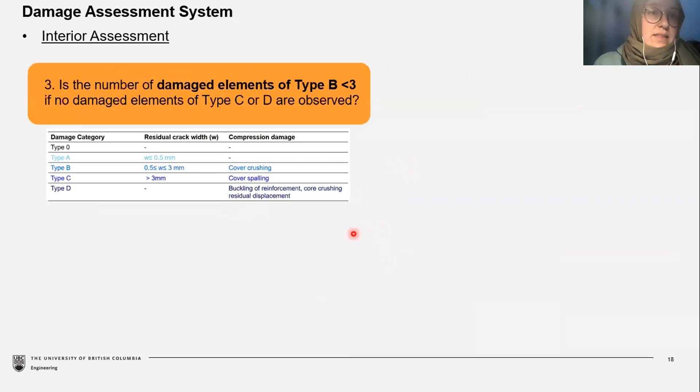But if your answer is no, continue to the third question: is the number of damaged elements of type B smaller than 3? If yes, this building is a slightly damaged building. If no, meaning type B damage is 3 or more, the building is a moderately damaged one.

For the fourth question: are all damages type A, regardless of their number? They may be 10, 50, it doesn't matter. If your answer is yes, the building is slightly damaged. And if there isn't any earthquake-induced damage, the building is undamaged.

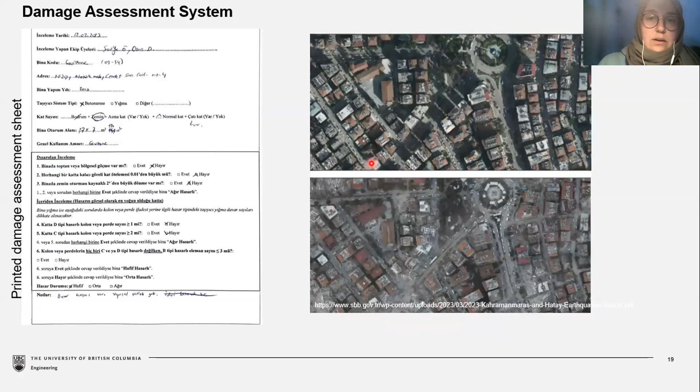To sum up, you see the extent of devastation in Kahramanmaraş, one of the 11 affected cities. Here you see the Turkish printed damage assessment sheet. You may wonder why we used a printed one during this era — it's because we didn't have stable internet access during the first days. I translated it into English for you.

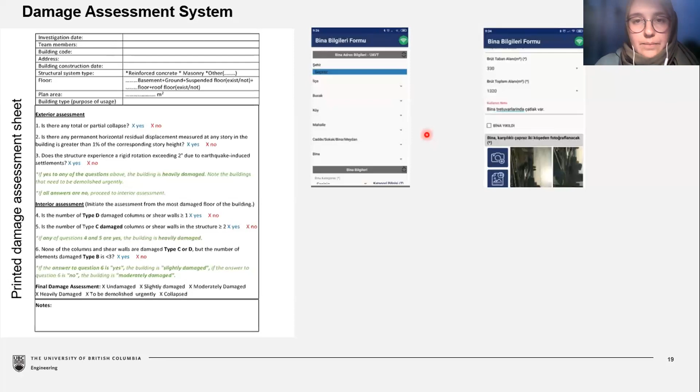We asked some questions covering both exterior and interior assessment. After we had stable internet access, we started using online forms for assessment. The tablets used during the assessment were provided by the ministry, and in one month approximately 6.8 million buildings and detached units were assessed.

So I totally suggest this methodology to other countries, since it's quickly implementable, easy to follow and understand. Now I've finished my part, so the floor is yours, Allison.

Thanks for listening. Okay, so I'm going to talk a little bit about the ongoing recovery efforts and the things we saw at the 3 and 4 month mark when we were in Turkey following the earthquake. Then I'll bring it back to the big picture and talk about emergency preparedness in general.

When you think about response and recovery, we usually think about the first few days and weeks — search and rescue, providing food and shelter, and post-disaster building assessments. But there's so much more to recovery than that.

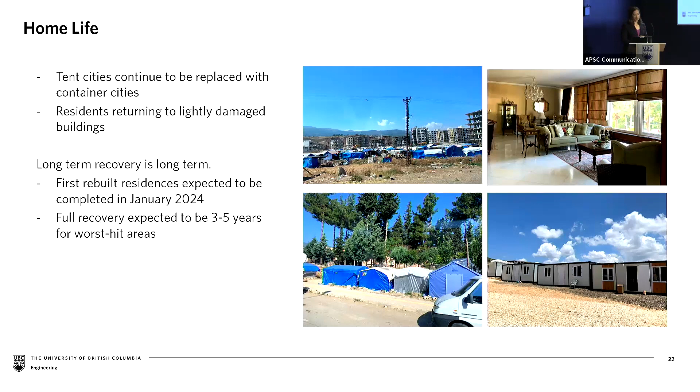School life. A lot of schools were closed for about 2 weeks to accommodate the post-disaster building assessments, but the goal was to get kids back to school as quickly as possible, whether in buildings assessed as lightly damaged, in tents, in prefabricated schools, or temporary structures. Obviously that didn't happen in 2 weeks, but a little bit later. Some school gyms were used as shelters as best as possible, but the schools got to function in two purposes.

They'd be used as schools in the day and shelters at night, just to house as much of the community as possible. In the functional schools we visited, most had at least one teacher and their family living in the school, just out of necessity and to be there for the kids. Schools are really a safe place for kids and communities, so it's important that they perform well so there's consistency and normalcy.

Bishnu said too, some people were afraid of schools, so whether the schools couldn't be used or it was personal preference, some did actually continue in tents.

Work life, just like the homes, people want to get back to business as usual as best as possible. Businesses are moving back into their lightly damaged buildings, cordoning off areas that aren't usable at this point, and moving into prefabricated structures and containers on a lottery-based system.

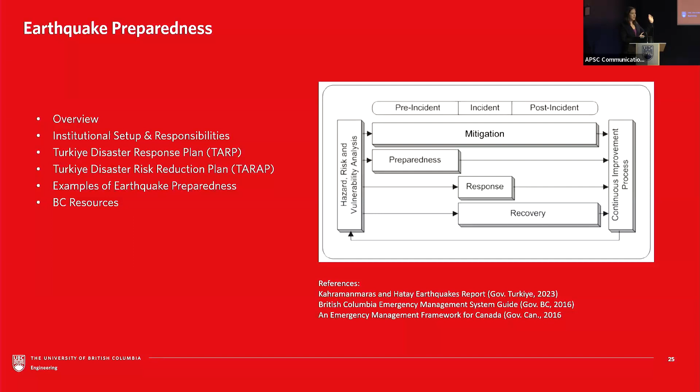I've just got a graph here. Emergency preparedness includes mitigation, preparedness, response, and recovery. You can see the relative timeline for each of the stages. There are many organizations involved in emergency preparedness.

In Turkey, these are the two key players. AFAD, the Disaster and Emergency Management Agency, is responsible for the Disaster Risk Reduction Plan and the Disaster Response Plan, and their key responsibility is to actually execute the disaster response process.

The Ministry of Environment, Urbanization, and Climate Change is the other key player. They're responsible for activities related to spatial planning, geological surveys, damage assessments, demolition of damaged buildings, and debris removal. You can see how they work well together in the response process. They also have other responsibilities in terms of improvement of professional services, regeneration and building inspections, climate change, and more.

I'm not going to spend too much time on this, but the Turkiye Disaster Risk Reduction Plan: other than updating the code every time we can learn from an earthquake, there are other things provincial, national, and local governments can do to minimize risk. Just like we do in BC, Turkey follows the Sendai framework, which has 4 priorities: understanding disaster risk, strengthening disaster risk governance, investing in disaster risk reduction and resilience, and enhancing disaster preparedness for effective response. This is developed with a variety of industry partners who have experience responding to earthquakes.

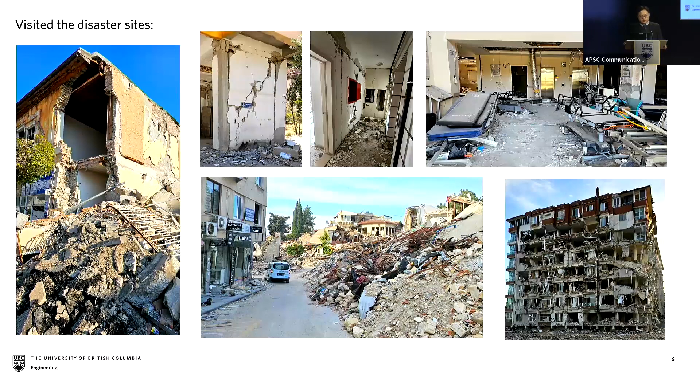We worked closely within our team and with our local engineers who worked with us throughout this trip in examining the structural systems, and we shared our Canadian knowledge with them and figured out how to examine structural systems together. We also observed foundation failures, going around and checking those out with them.

We observed reconstruction sites where they very kindly showed us how an entire village or town is actually reconstructed. They have fast, rapid, cost-effective technology to get those built.

We visited private dams, where we were invited to talk with the engineers and management about their systems, understand the failures, and how recovery should be done in those areas. We also brought our own tools from Canada and started observing and doing measurements ourselves.

We visited the hospital and were warmly greeted by real medical doctors. The president of the hospital greeted us as guests of honor from Canada. We walked through and examined the base isolated building with them. In fact, I spent the whole afternoon going through the basement with them, checking the structural safety, and we provided our engineering guidance to ensure those buildings will perform well after the next earthquake.

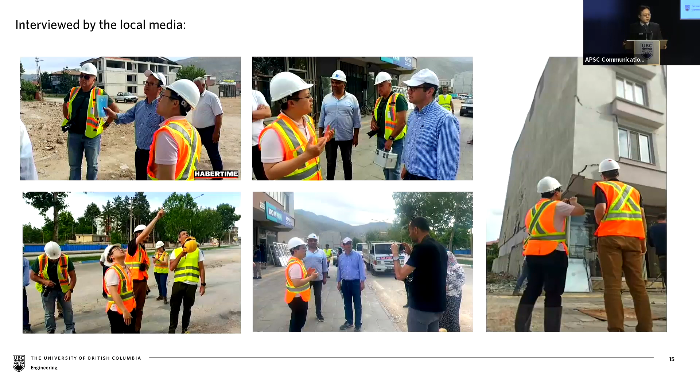So we were like celebrities. We were going around, news was following us, and we were all over the Turkish news for the Canadian teams being in town.

Along the way, we did things the Canadian way. We mingled well with the locals, and we made many good friends, which will last for a lifetime of experience.

Through these trips, I'm very honored to take my team. We bonded for five days, day and night. We wake up at 6 a.m., and by 6:30 they better show up in the lobby. We have breakfast and we go. By the time we came back, it's usually 11 p.m., sometimes past midnight. But over this time, we became a very strong and bonded team. These are my academic family now. We had a great time walking along, learning from each other.

Today, we were lucky enough, through the support from our financial organization, to come here and present what we have learned. A report will be prepared, and today is the first of a series of things we presented. We were lucky enough to have the Consul General from Turkey give the opening remarks, and we went through today's seminar. Everything is recorded, so sooner or later our applied science team will be able to show you where the recordings are.

Here are some of the takeaways. This is truly one of the biggest earthquakes experienced by mankind. Eleven major city centers have been completely destroyed by this earthquake. More than 14 million people were affected - that's half the population, close to the whole of Canada. Very sadly, over 50,000 people have died in Turkey, and over 100,000 people were seriously injured. We saw many buildings damaged, and the total financial loss to Turkey at the moment has already tallied to $103 billion.

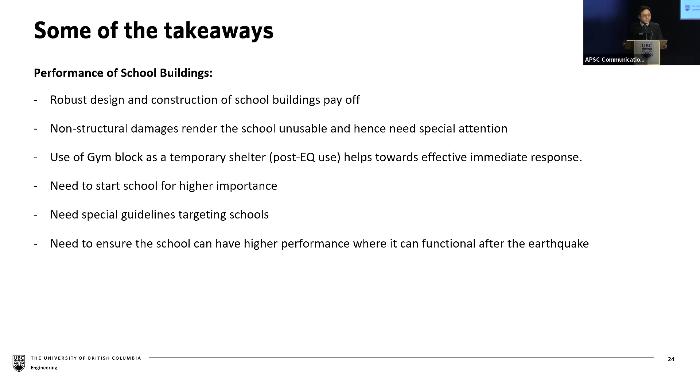We see many non-structural damage cases, so that's something Canadians need to start paying attention to. In the schools, our colleagues in Turkey do very well, so the schools are ready to be used as shelters past an earthquake. And the health facilities are doing very well.

We hope this kind of mentality will be brought here to Canada. Our Turkish friends are doing very well in preparing for what they do, and we must learn from this community, so that when the next earthquake hits our region, we will be safe and sound.